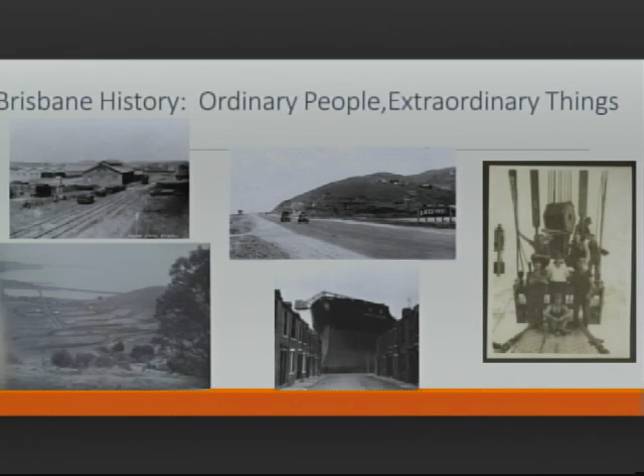Brisbane built housing for these workers, and I saw a statistic in the Brisbane history books that during the Depression, almost 400 homes were built during the early years of the Depression, which was quite a rate at that time. Some say the city doubled in size over that time. This rapid change was uncomfortable, but the city did its part.

The question I would ask is, what sets Brisbane and the Bay Area apart from the rest of the country? I'd submit it's that we think different. We adapt to change, and today the Bay Area is doing what it's always done. It's changing as fast as it ever has, only what we're responding to is a little different.

The war we're fighting today is the war to fight and cure diseases like cancer and AIDS, that's happening right next door with the biotech cluster in South San Francisco. Our clean technology firms are working to eliminate our need for oil and stop climate change. Our leaders in Sacramento set climate policy, about the time this EIR was initiated, that is now a worldwide benchmark for climate reduction. But as we rise to meet these challenges, and the best and brightest from around the world come here seeking opportunity, we really are running out of places for them to work, live, and play.

Now, UPC developed a plan to solve this problem, and it responds to both Brisbane's drive to clean up legacy pollution on the Baylands site and move the needle on climate change by building the most sustainable project in America. That's what you ask for, and that's what we want to deliver.

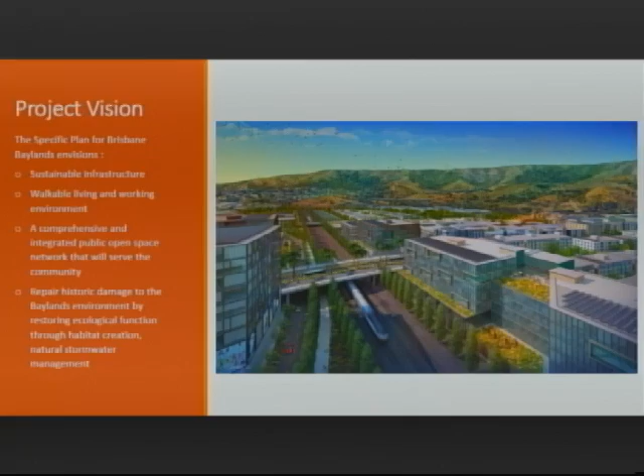Change is constant in the Bay Area, whether we like it or not, and Brisbane has a chance to shape it. Indeed, that's what you're doing, and accomplish its objectives, preserve what makes the city special, and meet some of the greatest challenges of our age.

Now, most of the attributes of the project, we're not here to reintroduce to you. You're long familiar with what we believe are the great benefits of the project, having a regional transit hub with 90% of the development within a 5 to 10 minute walk of multiple modes of transit.

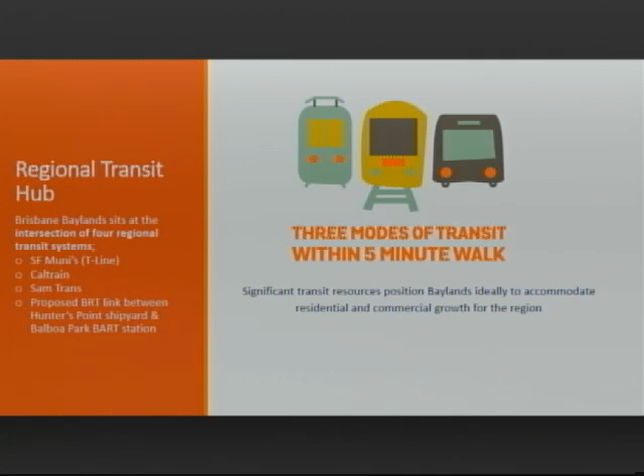Many benefits, again responding to years of community input, around being a center for education on restoration ecology, zero net energy consumption, hundreds of acres of open space and open area, hiking trails, biking trails, and facilities that include a 2-mile extension of the Bay Trail, land for a high school, much needed retail services, and though there is great debate, of course, between regional and local priorities, 4,400 housing units to address the housing shortage.

Our sustainability summary plan was in our specific plan that was revised in 2011 to include some of the key elements that have been described, but we're also endeavoring to understand what some of the aspirations of the sustainability framework mean as they're translated into a project like this, and we've been spending a lot of time on that.

This is critical for us because we understand what a bar that Brisbane sets for this, and how much being branded, if you will, like South City has become branded as the biotech city, that it would be a really great thing if Brisbane could be the green tech city, or the environmental technology city, or the innovation hub city with the future development of the Baylands.

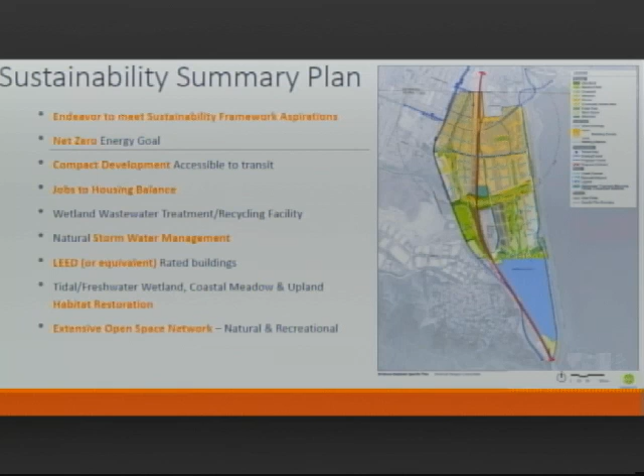Just for the record, before we move on, I want to note that the 1973 buffalo roast here in downtown Brisbane was not — here's our plan, which you're very familiar with. I won't go over it again, but that buffalo roast apparently made it to the Guinness Book of World Records. I just want to note for the record that that's Anya Miller on the left, who was serving back in September 1973.

With that little reminder, I'll just on a more serious note say that this truly is one of the most well-considered, longest environmental reviews for a project of its type in California history. It's complicated. It certainly deserves consideration. But one of the reasons we're very grateful for the time tonight is that we ask you to consider expert conclusions and community opinion before making your informed decision.

So with that, I'd like to turn it over to our first consultants. You're going to hear from WRT, Biohabitats, Brown and Caldwell, and GI Energy first, and later from Geosyntec, BKF, GraphCon, and EPS.

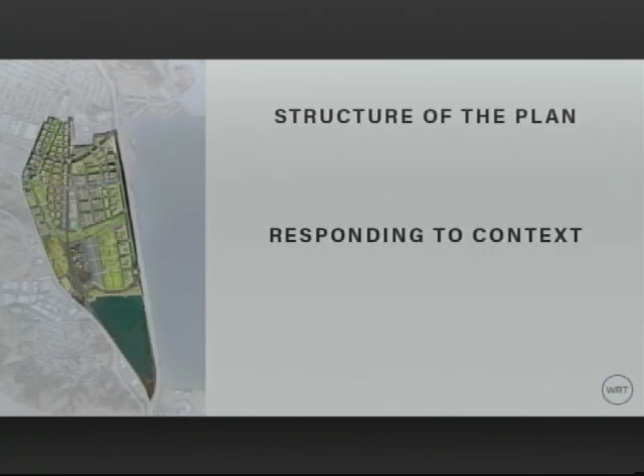Whether we're responding to special ecological assets in the south, like the lagoon and tidal channel, Icehouse Hill, that directs our approach in the southern part of the site. In the north, those context influences are different. They're about adjacent neighborhoods, commercial areas, infrastructure, and transit, both existing transit in the Third Street Light Rail, Caltrain, Samtrans, and the proposed BRT line connecting Hunters Point to Balboa Park BART Station. So the plan responds to those different contexts.

In the southern portion of the plan, there's an open space influence that seeks to stitch together the ecological assets of the lagoon, tidal channel, and Icehouse Hill, creating a broader matrix of public open space interspersed with a few other things. There's a solar farm that forms a buffer between the large Central Park and the Kinder Morgan fuel depot, and some sites for very low density campus uses along the eastern edge. But predominantly in the south, there's an open space influence.

In the center, it's a little different, getting closer to transit. There's still open space integrated with development, but this development tends to be lower density, two, three, maybe up to four stories, with a heavy infusion of public open space. The two public space elements are the Creek Park on the west side, terminating in the Roundhouse Green, and the central quad on the east side, around which some of the low-density campus sites are clustered.

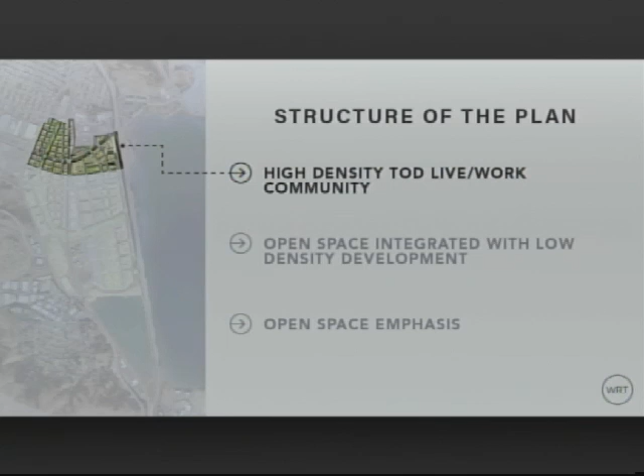And in the north, it's different again. Here there's heavy influence of existing infrastructure and transit resources, including the planned BRT line. This is the place to cluster density and take advantage of that transit, addressing some of the regional jobs-housing balance while creating a neighborhood that fosters a living and working environment. There's quite high density, compressed if you will, in the northern part of the site, taking advantage of the transit and infrastructure resources.

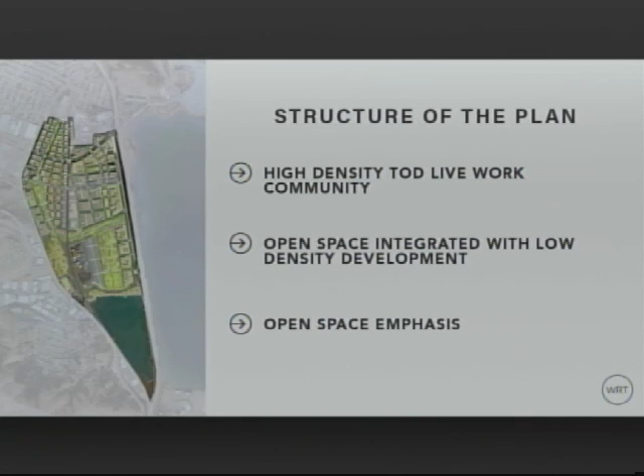So that's the basic structure of the plan. I wanted to touch briefly on what it feels like in each of those areas.

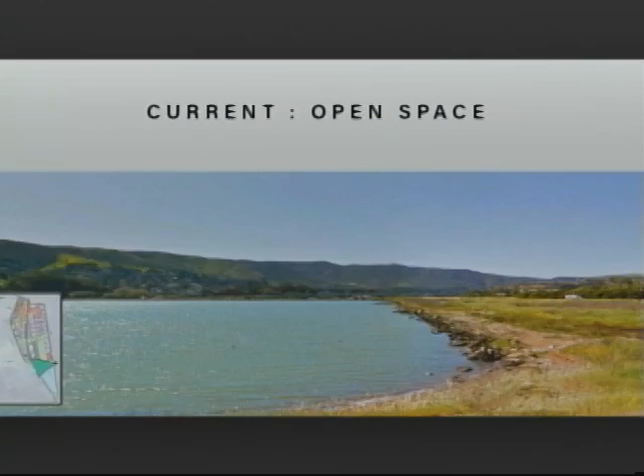Starting in the south, this is a before view of the edge of the lagoon, looking west along the north edge. You're all familiar with this view. The proposal is a park that would encourage passive recreation, a place to experience nature and ecology, characterizing much of the open space proposed in the southern portion from the tidal channel southward, despite some land uses like the solar farm and limited campus sites. Most of the area would be passive recreation, with a small bit of active recreation, perhaps some ball fields, but mostly passive, eco-friendly open space.

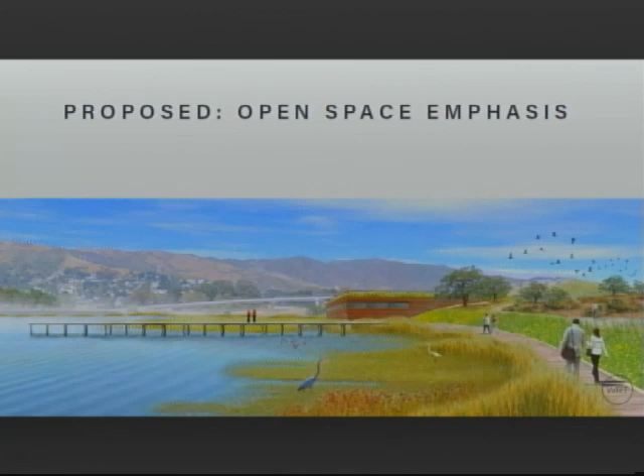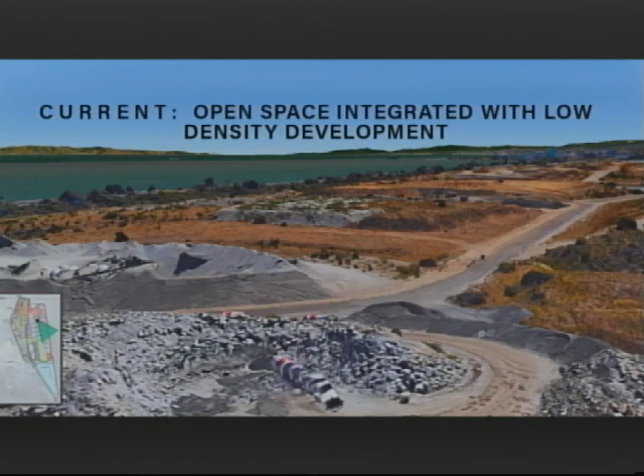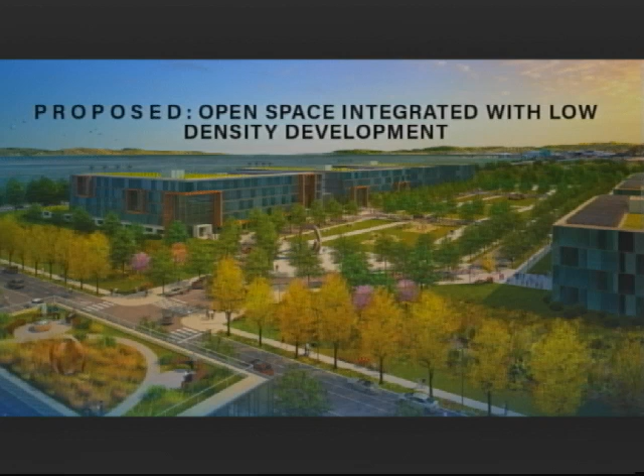In the central portion of the site, this is the current situation. Many of you are familiar with the soil recycling operation that occurs there now. This is looking south from the central portion, southeast rather. What you see here is the lower density campus sites, two, three, perhaps up to four stories, with a strong infusion of public open space. This would be the central green extending southward, connecting to the tidal channel park and the larger recreational park south of that.

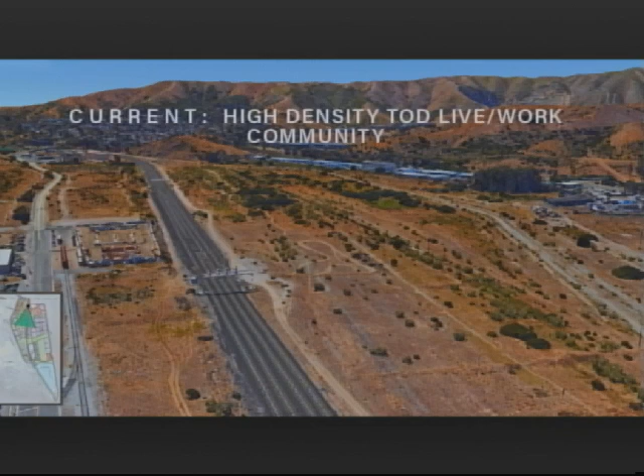And this is the northern portion of the site, now with the Caltrain station in the central foreground, looking south towards San Bruno Mountain and the town of Brisbane. This is the proposed view of that area. As I said before, density is really concentrated around the transit, with office and R&D space very close to it. Going further out to the west, stepping down a little, you can see housing and other commercial uses, and opportunities for different kinds of retail, mostly ground floor retail within a mixed-use environment.

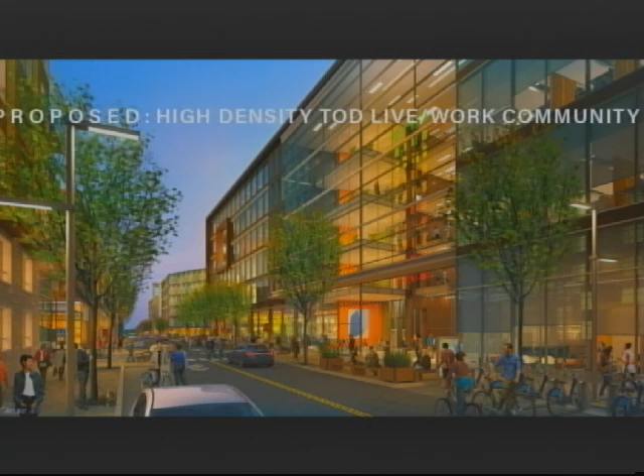And then finally, this is a view in that area, the higher density transit oriented. So we're standing here looking northward. We have the Caltrain station on our right, and the future view of this would be this mixed-use neighborhood, where living and working are cohabitating in the same district. It's a lively neighborhood enlivened by the mix of uses—retail on the ground floor, some residential, some office, very transparent ground floor uses—someplace that feels safe to walk, pleasant, and not dominated by cars.

So that concludes my presentation, and I'm going to go ahead and pass it on to Pete.

Good evening, my name is Pete Munoz, ecological engineer with Biohabitats. Much of our work over the last decade with UPC has been exploring and identifying opportunities for natural system design elements in the redevelopment areas, as well as restoring ecological function by enhancing habitat and ecological features in more of the natural areas. Biohabitats is a national expert in integrating green infrastructure and ecological systems in redevelopment projects. We were early adopters of LEED, SITES, and the Living Building Challenge, those type of green building frameworks. Our work took a deep dive into the science and ecological function of these systems. Over half of our staff are technical scientists, so we really come at it from that approach, as well as creative ways of reconnecting community with our infrastructure, both in the natural and built environment.

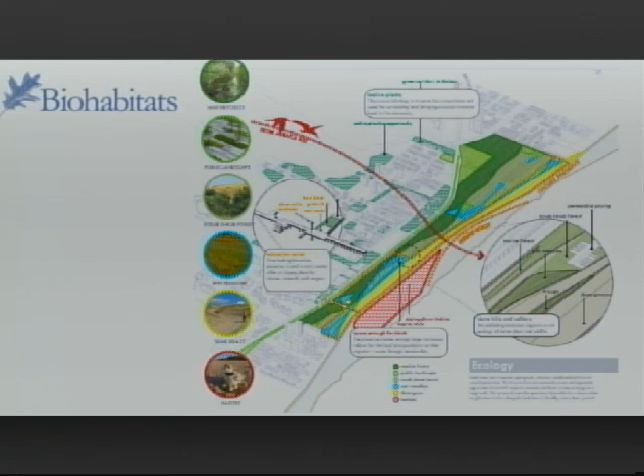What's interesting about creating a community like this is it has multiple functions. It does define open space, it protects against storm surges by creating a multitude of shoreline ecosystems, but it also becomes the backbone of the built infrastructure, inviting connection to some of the more conventional stormwater infrastructure, creating a kind of stacked benefit or solution multiplier in design.

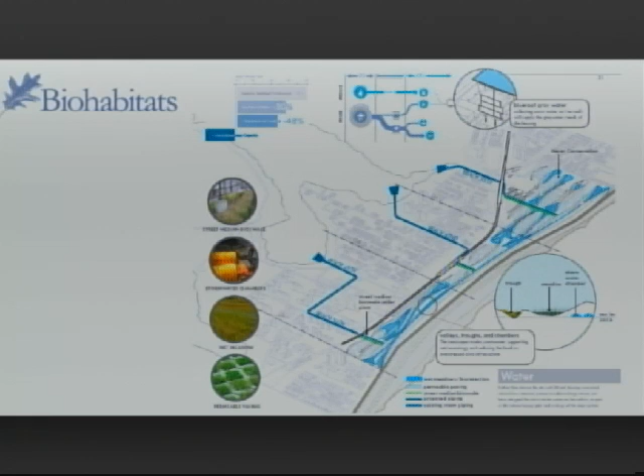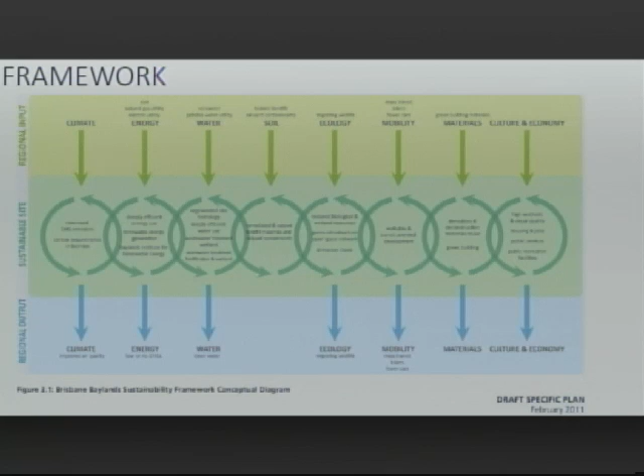That's very similar to a lot of our other work, and was clearly the intent of the framework in the specific plan—creating stacked benefits, so they're not just open space, but we're increasing biodiversity, conserving water, enhancing ecosystem function, promoting sustainable mobility, and creating vibrant culture and economy.

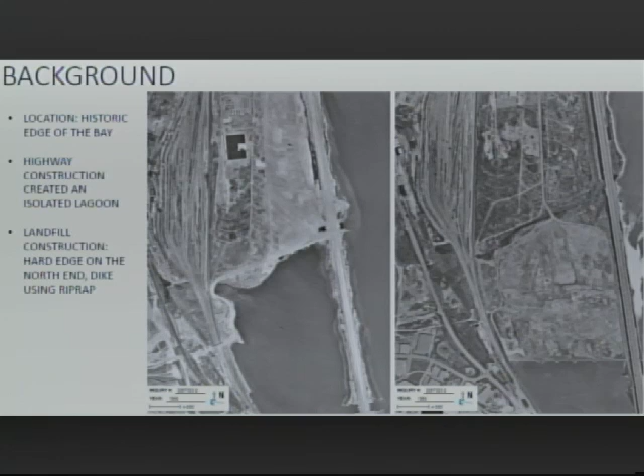And of course, we're starting from a place that's fairly disturbed—this is an artificial landscape created by our conventional roadway system and the landfill. This is a challenge our company is very familiar with, probably best compared to some of our work with the Fresh Kills landfill, historically one of the largest landfills in the world. We did a lot of habitat enhancement at Fresh Kills, including upland and marsh habitat, similar to what's planned here at Brisbane Baylands.

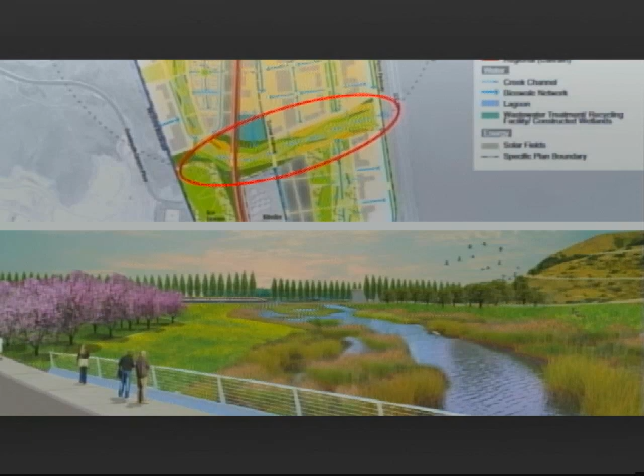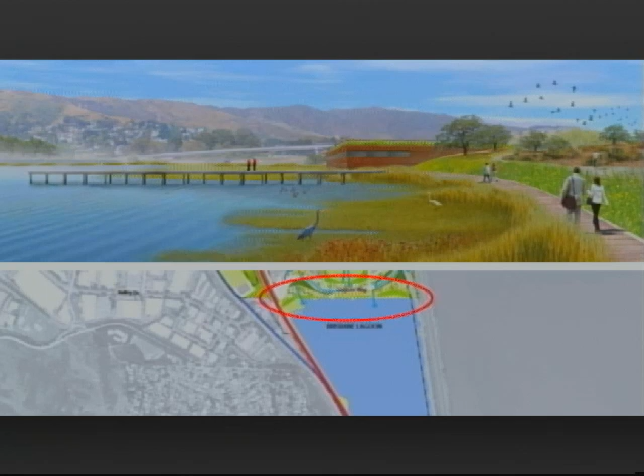The two areas we've primarily focused on are the Center Visitacion Creek area—looking at not only creating open space, but broadening the floodplain and increasing ecological function around that east-west corridor—and the north shore of the lagoon shown earlier. This is maybe one of the biggest opportunities for creating ecological uplift on the site: creating some transition zone habitat that's desperately needed in the Bay Area, a need concluded by a bunch of recent studies around the region.

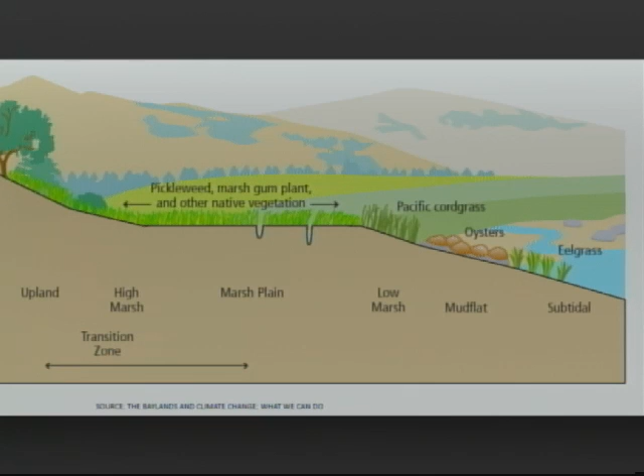Just to unpack that a little, transition zone habitat is really from the upland into the marsh plain in tidal-influenced areas. Some of the concepts we've looked at include increasing the width between the roadway and the water's edge, creating a gentler slope so there's more opportunity for biodiversity and habitat, as well as invasive species removal and native plantings. Our team has reviewed these concepts with other regional experts as well as with regulatory agencies, the BCDC, and they're all in line with best practices moving forward in the region.

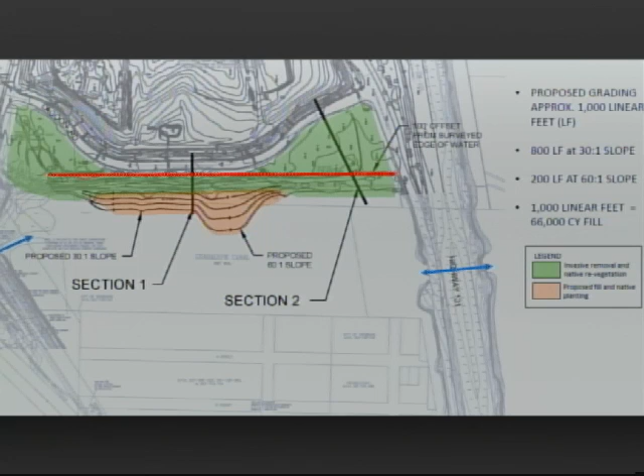And that concludes my portion. Thank you.

I'm Bill Feist. I'm with Brown and Caldwell. My title now is Senior Fellow. I've been with the company over 40 years. Our focus was on potable water and recycled water for this project, potential water sources in California's future, and then what fits for the Baylands.

Brown and Caldwell is a California-based firm. We started in San Francisco 70 years ago, and we've been doing water work starting on the West Coast, now all across the country, doing a lot of green infrastructure projects with various levels of public benefit. We've done work for BAWSCA, representative of SFPUC, on water conservation plans and water efficiency use, looking at how different programs could benefit the communities and improve their water use. Another example, we're working with the San Diego Pure Water Project on direct and indirect potable reuse now. So we do a wide range of work on water, but in a continuum from water through wastewater and back to potable water, as is appropriate for the community.

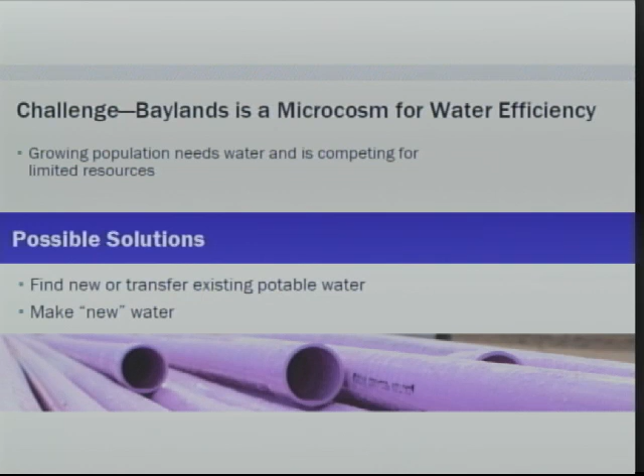The challenge for the Baylands was to come up with something that we think will let the Baylands be a microcosm for water efficiency. Growing populations need water, and everybody's competing for that limited resource. So we're looking at focusing on possible solutions, new or transfer of existing potable water, and also making new water. Sometimes you hear it referred to as purple pipe. First, the best use of the existing potable water.

You want to look at retrofitting existing facilities, installing new equipment with maximum efficiency, and then monitoring that system. It's a living system where you need to keep on top of it to be sure you continue to use it efficiently. Things happen, pipes leak, you want to get those. And then finally looking at transfer of unused water rights.

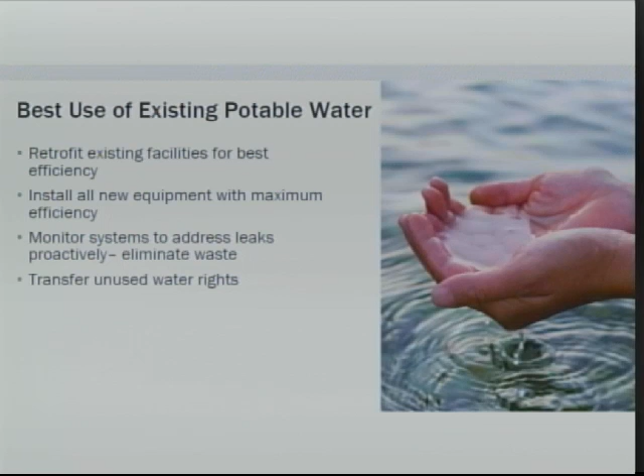Where could this new water come from? Because Brisbane has used up all its allocation through BAWSCA from SFPUC, we went through a water planning process in line with what's required by the state of California. Water supply project planning through SB 610. We looked at a variety of alternatives with different levels of efficiency.

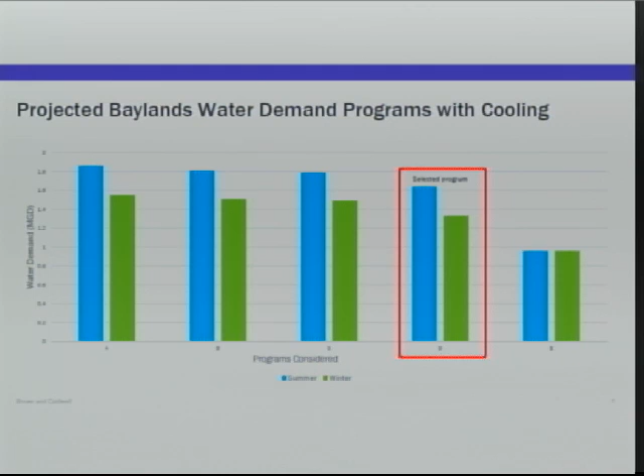Some of these, the early ones, A, B, and C, were in line with what BAWSCA was doing, and then we got into programs that would involve more recycling and higher efficiency use of water to get a very water efficient profile together. We looked at opportunities for Brisbane and for the Baylands.

There were a lot of things we looked at that just were not feasible given the geographical and geological characteristics of the community. Rainwater harvesting, no place to store it. Fog harvesting, giant Christo sheets on the sides of the hills probably wouldn't work. There's no groundwater to develop. We looked at desalting, there is no brackish groundwater to desalt, and desalting the bay water would have ecological consequences. So we focused on recycling wastewater and then also on transferring water rights.

You can take that recycled wastewater and you can irrigate with it, you can use it as cooling water, it can be used to restore wetlands, you can flush toilets with it. And all these things, if you're following the trends, for example, in San Francisco, a lot of these things are reality now. If you go to the PUC building, you'll see that they're doing a lot of these things for recycling right on site and transferring of water rights.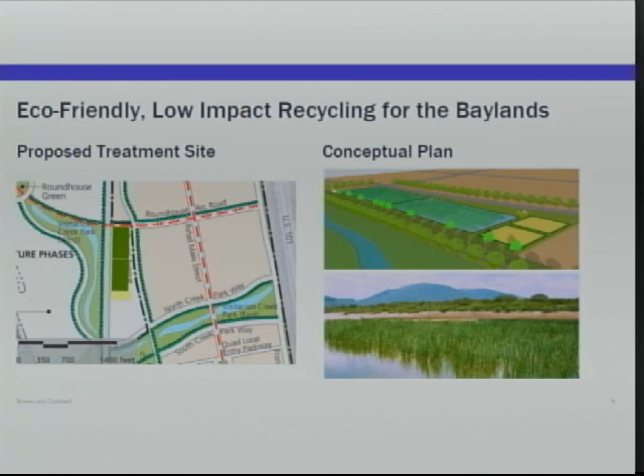Finally, the last part of this puzzle is where the potable water is going to come from. UPC has done the prospecting for and facilitated a potential transfer in the Central Valley to move unused irrigation water rights to SFPUC, so that SFPUC could deliver more water not only for the Baylands but also for the community of Brisbane. You're out of water for other things you may already want to do in the community, so there is not only the base amount for the Baylands but also potential water for other community needs.

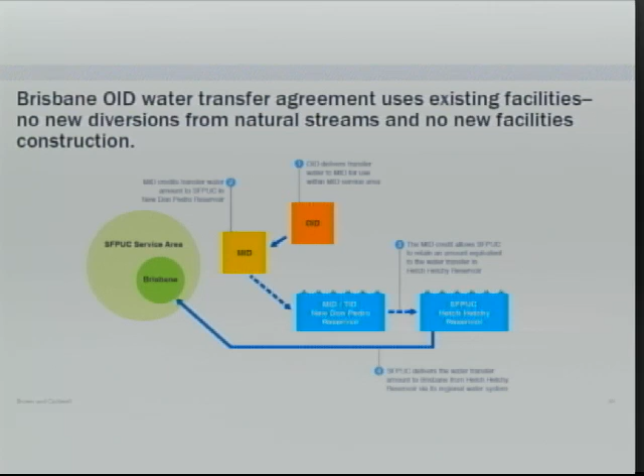I'm with GI Energy. GI Energy is a developer of sustainable energy resources. We focus on a technology-agnostic view of what's out there and how it can be brought to bear, with a specific goal of marrying technologies and supply to actual demand. So not building big wind farms or solar farms, but really focusing on what a facility's energy use is and then marrying up the different technologies around that.

We're a full-service provider. We take everything from energy master planning all the way through construction, installation, and ongoing services. Our approach is to look at things from the very beginning and make sure we're actually building systems that will do what our customers and clients need them to do, but also operate efficiently and allow us to optimize them over time.

One of the things about the energy industry is that it is an incredibly dynamic marketplace. Technologies are changing, financing is changing, the needs of communities are changing. So we need to ensure that everything we do on every project is forward-looking and can plan for these future changes that are going to impact everything that all of us do.

I'll skip through that and walk through a couple of case studies, and then I'll talk specifically about our approach for this site.

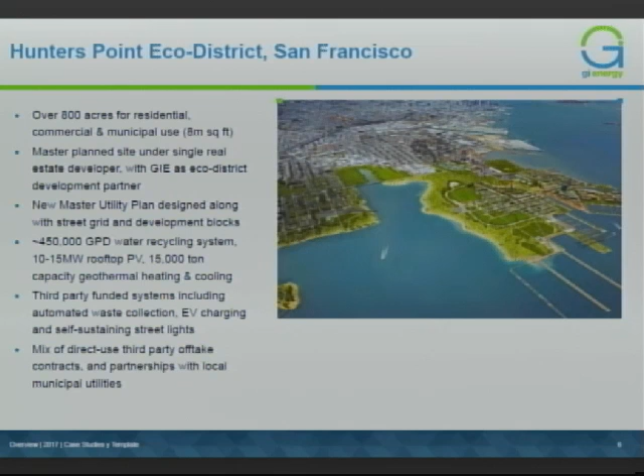We're currently working with a neighboring site, the Hunters Point Candlestick Point Shipyard, and our role is on the entire Sustainable Infrastructure Master Plan—delivering renewable energy, recycled water, and a large geo-exchange HVAC system to be the centerpiece of this eco-district. We're looking to bring in all of the new technologies currently under development, but build something flexible enough to last 50 years, so we can continue to innovate as the community develops and stay here for the long term.

We've just finished a project in New York City with Cornell University, doing the geo-exchange system underpinning their new STEM campus built on Roosevelt Island. The original concept for the Bloomberg building, the first building that went up, was to be a net zero energy building, and the only way to accomplish that was with a geo-exchange system to handle the HVAC. We're continuing to work with them on the rest of the campus build-out, ensuring we meet the goals of both Cornell University and the City of New York.

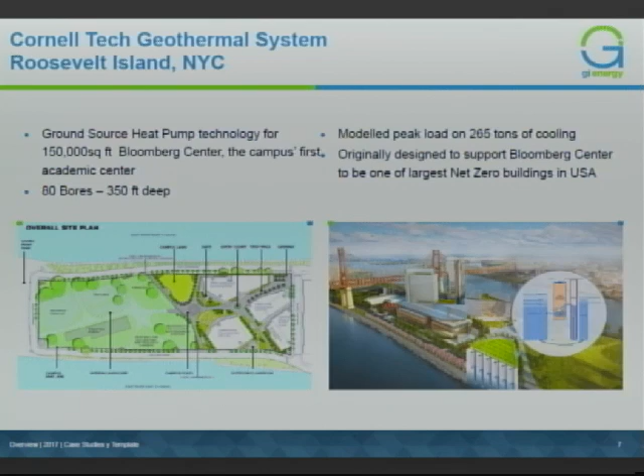Also in New York, we're working with Con Edison on piloting one of their first energy storage projects. The concept is to understand how energy storage can provide services both to the legacy grid and infrastructure already built, but also to end-use customers and regional transmission operators—understanding how secondary markets come into play and how innovative, long-term financing can help unlock the potential behind these technologies.

Finally, we were a pioneer in developing Connecticut's microgrid program. About a month ago, we completed commissioning the first microgrid in the state of Connecticut, working with the city of Hartford, combining a load pocket involving a school, a grocery store, and a gas station that during large-scale power outages can provide an area of refuge, groceries, and fuel to the local community.

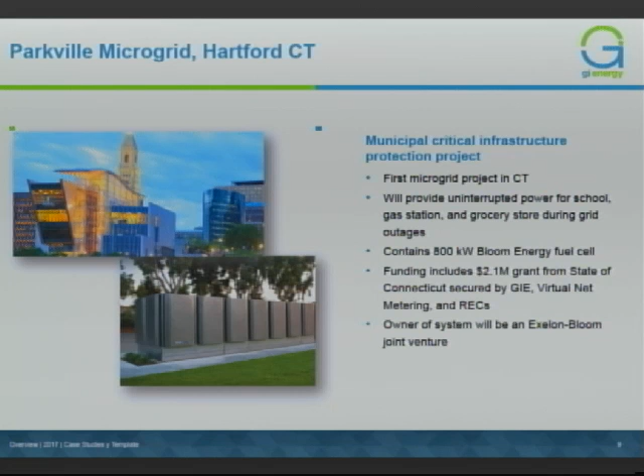So it's really that concept of ensuring that whatever we build needs to have an economic rationale, but it also has to have a community benefit that can actually provide services that would otherwise not be there.

Our approach for the site is fairly simple. The way we look at it first is when you're planning for long-term innovations in the energy sector, what we've all agreed upon in the industry is that we need to electrify everything we can. We need to get away from using natural gas or fossil fuels for thermal energy. So the first step is to ensure that we've electrified systems that would otherwise be consuming fossil fuels.

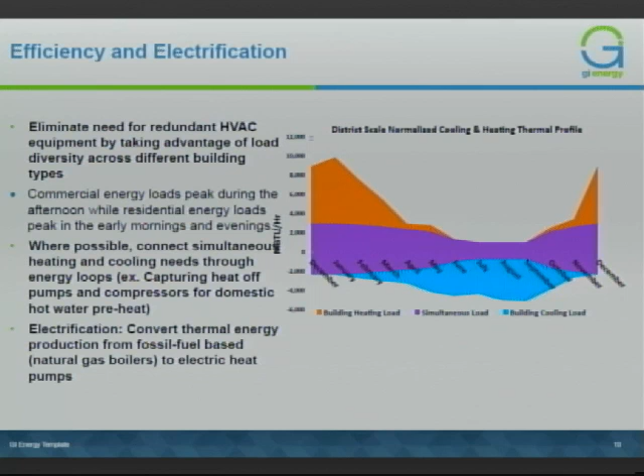Then we look at how we can actually combine a variety of loads to create a diversity that allows us to use the same equipment to serve multiple uses. And this is where these mixed-use developments are just phenomenal from an energy planning perspective. By having residential and commercial use, you can use the same equipment essentially 24 hours a day. Instead of having to build redundant systems in disparate areas, we can actually use that same kilowatt hour, that same BTU of energy over and over again throughout the 24-hour period to meet a variety of uses. And that's really why we'd like this approach of trying to build district-wide systems that meet residential, commercial, R&D, and in some cases industrial and healthcare needs.

Next, once we've electrified everything, we want to ensure that we're getting our electricity from as carbon-free sources as possible. One of the easy things to do is to actually just secure off-site RECs, and that's really been the approach that's been done for the past 20, 30 years. And that will take you so far. There are enough projects out there that we could actually buy those RECs from to apply a credit. But that's not really the remediation that we are trying to do on greenhouse gas emissions long term. It's about building renewable systems at the source of use.

So once we've done that, then we want to maximize our use of on-site renewable energy, and that's through photovoltaics and wind where feasible. Then we want to deal with the issue that we have with overproduction and with the import from the grid by ensuring that we're installing enough energy storage to both increase our utilization factor of the renewable energy, but also minimize our off-site power import and provide potential other services like backup power and other sort of resiliency benefits.

And then finally, and this is a big one for this site, because we've electrified the thermal demand, we want to ensure that the systems producing that thermal energy are as efficient as possible. One of the most efficient ways to produce heating and cooling is through a geo-exchange system. It has the benefit of creating highly efficient chillers and heat pumps, but it also has the added benefit of reducing a significant amount of water usage that would normally go to mechanical cooling. So that's really a key piece of looking at this entire holistic approach and saying, where can we pull all the different levers to reduce greenhouse gas emissions and reduce the environmental impact of a site like this?

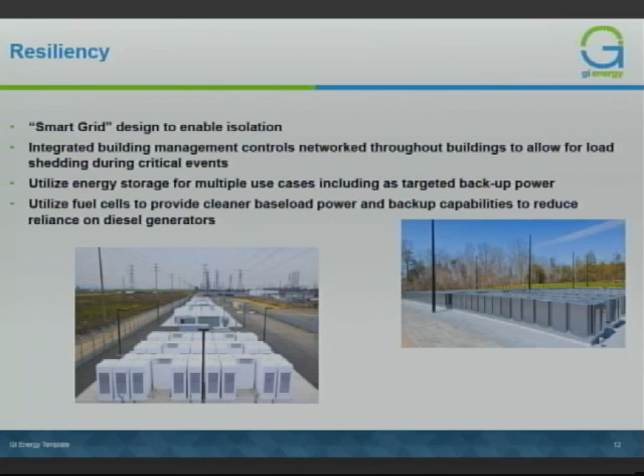And finally, we need to make sure that this actually can pay for itself. One of the guiding principles of the work that we do is ensuring that everything we do has a rational economic benefit.

And for some of these higher cost systems, some of these more innovative systems, there is a large upfront cost. But it can be paid for when you look at the entire life cycle of an operation. So when we start to broaden our time horizon from 5 years to 10 years to 15, 20, 30 years, you can start to unlock some very innovative low-cost financing. We work with a number of different infrastructure funds, really focusing on being able to deliver today benefits that may not actually accrete for 30 years, and utilize innovative financing to ensure that we can do the right thing by our communities, by the municipalities that we serve, and by our end-use customers. That's essentially it, and we're looking forward to continuing the conversation.

Thank you. Can I get your name again? I didn't catch it. It's David Yanni, and I'm Chief Development Officer for GI Energy. Thank you, David.

Did you want to come back up and say a few words? Yes, thank you, Madam Mayor. We were hoping at this time to take up to a half an hour period, longer if you'd like, for questions from council directed at myself or any of the consultants that have spoken thus far on the content that they spoke about.

Would anyone like to ask some questions? Any questions? I had a couple. Okay, Pete, if you could please, you showed your picture up there.